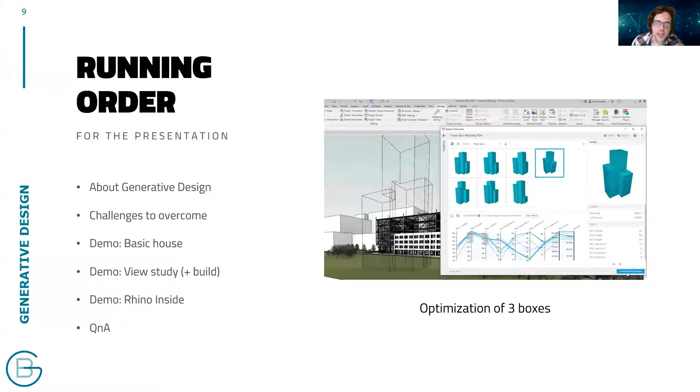I was going to build it, but I think that might take a little too long. I'll focus on at least what's happening inside Dynamo so you can understand the relationship between the generative study and the Dynamo script. Then I'll briefly show an alternative approach using Rhino inside Revit—not just Rhino and Grasshopper, but actually running Rhino inside the Revit engine. Then a brief Q&A session after that, hopefully.

So what is generative design? Simply put, it's generating multiple outcomes for a given scenario or challenge—taking a problem, finding multiple solutions, and then measuring their success, or what we might call fitness, which we usually measure as a number so we can easily compare it to other studies. From there, we can filter, cull, or select the best outcomes from that field of studies.

This gives us access to a dynamic way of testing both flexible and rigid constraints upon a design challenge. Rigid constraints might be something like the planning volume a building has to occupy, whereas flexible constraints might be the dimensions of that building within that planning volume.

We could imagine the most simple generative study possible being just a box with 2 dimensions. We'd first establish our flexible constraints—in this case, a width and a height. We then say we have domains to test between, an upper and a lower value, like a slider the generative tool can flex between. Typically this is how most generative solver tools work. So in this case we have 2 domains, 1 per variable. From here, we need to establish a fitness goal.

This is usually the most important part of a generative study, and it's one of the things I recommend you identify as early as possible: what is the measure of fitness? Because we can't always easily measure something that relates to fitness, given that it usually needs to be a number, especially if you're doing something with an aesthetic measurement, like how good a design looks. That's usually hard to measure with a number. But in this case, we could say the perimeter or the area, and minimize or maximize as a target.

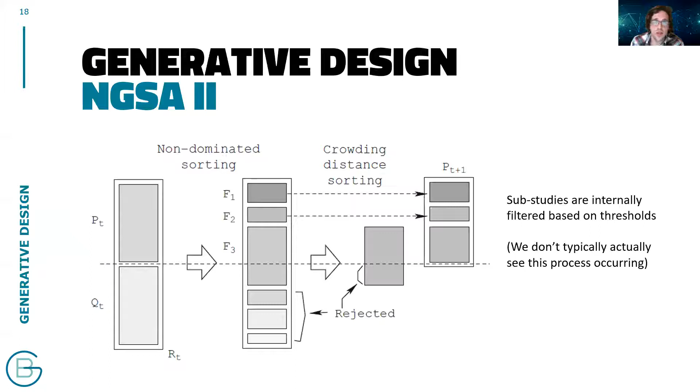But I guess the good news is that at the surface level, we just see the tools and the solvers. Autodesk's algorithm sort of lurks behind the scenes - I believe it's the NGSA2 algorithm, or at least a take on it - but you just see the surface of what happens there. So the good news is you don't see it; the bad news is if you want to manipulate the algorithm more, you don't have that deep access into that routine. But I think most of us wouldn't know how to manipulate it anyway.

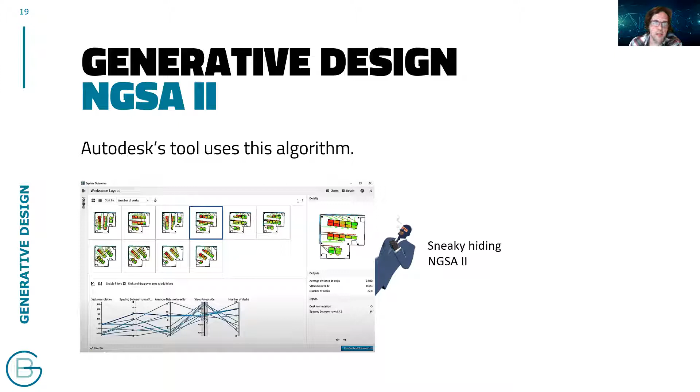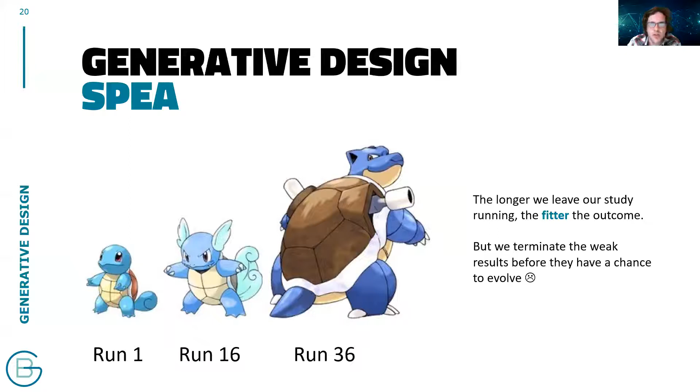The alternative is SPEA. This is used in tools such as Galapagos for Grasshopper. I like to look at it more like an evolutionary process - you're taking something, and as you leave it for longer or run more studies upon it, it gets better, or fitter. Unfortunately it also means we're terminating the weaker results, so not every Pokemon makes it. But yeah, the Galapagos engine for Rhino 3D is essentially using this algorithm.

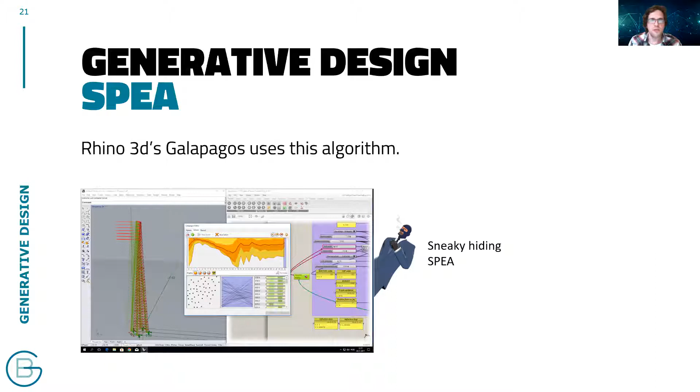Unlike the Autodesk tool, you'll see in my demonstration that it actually exposes a lot of the generative aspects of the algorithm to you much more holistically, which I hope is maybe something Autodesk is looking at doing in future as well. But simply put, it's a little bit like this: in Grasshopper, we call the generative inputs genes, and we feed them through a study or an algorithm that we write ourselves. If anyone doesn't know what an algorithm is, it's really just a set of operations to lead to a result. So when I say an algorithm in Grasshopper, just see it like a script.

We get the goals, and then we analyze those goals and how our study went, and we send back the best results to the input genes. So we're essentially clamping those slider values until we get an optimal or optimized outcome. This is sort of how that process of evolution works.

One thing I've noticed with generative design is it has become a bit of a buzzword or a hype cycle. We see these pop up quite often in architecture. Probably the one before this was artificial intelligence, which is still doing the rounds, and digital twin to some degree. A lot of people are talking about generative design, some are playing with it, but I haven't seen a lot of firms actually contextualizing its use. There are some, but many are just experimenting and haven't quite found the fit for the tool or workflow within traditional architectural practice thinking. So it can feel a bit that way if you're just starting to explore it.

So I always say to folks that it's time to look at who's actually using these tools and why it's been successful, how they've made it successful.

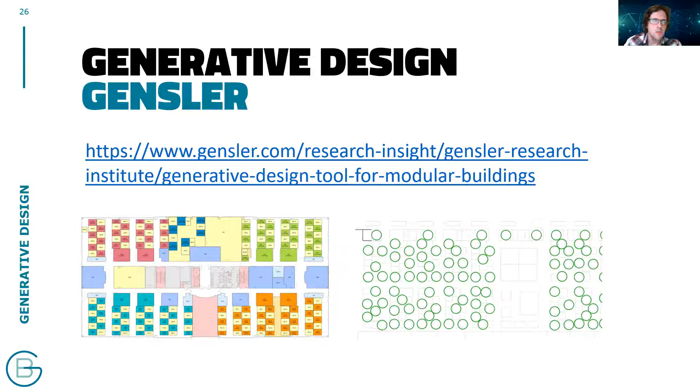GENSLER, for example, doesn't share as much about what they do, but I know they're using generative and solving-based routines for things like chair distributions in their offices, finding optimal maximum seating arrangements based on COVID separation, which is actually what a lot of people are probably using generative design for right now.

Companies like TestFit are using what you could probably call generative design, or at the very least algorithmic design, to find optimal layouts on sites. This leads to rapid prototyping tools such as TestFit, which enable people to bypass a lot of the manual design processes that usually take a lot of time during feasibility or master planning stages.

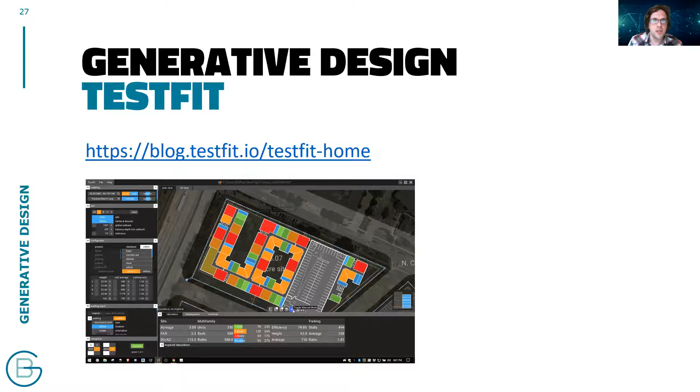It's important to understand that generative design isn't new by any means. Generative design itself has been through a few different stages of development with Autodesk. Probably the latest one people knew about was Project Refinery in beta, and it had a few iterations before that. What we have now is similar to Project Refinery. There are small changes at the surface level, but for the most part it's been a fairly consistent tool for the last couple of versions.

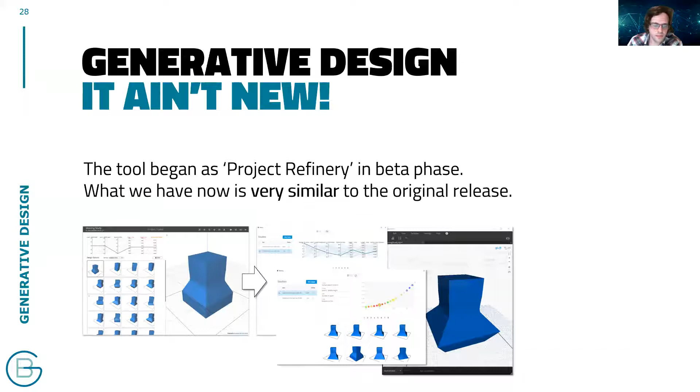Generative design itself came to Revit 2021 near the end of last year, but it's important to note that Rhino 3D has had these types of tools available for almost 10 years. This really leads me, and probably anyone else, to ask: if we haven't embraced this as a firm, as a person, as an industry, will it change just because Revit got a new tool? I'd say in a lot of cases, probably not, but at the same time it does raise the question that maybe there are some things that might make us consider it.

So the big question is, if we weren't using it then, why would we use it now? Some good answers are that our computers are stronger. We can run more studies more quickly on more computers with more memory and more software that can support it. We're also learning how to code in AEC now, so programs like Dynamo have exposed more people to a computational way of thinking, which is really required in generative design. As well as this, our projects are becoming more complex, so there are more complex things we're measuring, creating, and analyzing.

So this could be a way to solve some of that complexity that analog processes can't really take on. As well as this, a lot of our clients are becoming more data-centric, or we're taking on clients that already think from a data-centric perspective. For example, I can see companies like Tesla starting to move into the architectural industry, at least from the production of their own factories. They have in-house BIM managers now that I know of. So it's interesting to see that the programming sides of all the industries out there are starting to coalesce a little bit more. Some bad answers for why generative design might be something you're considering.

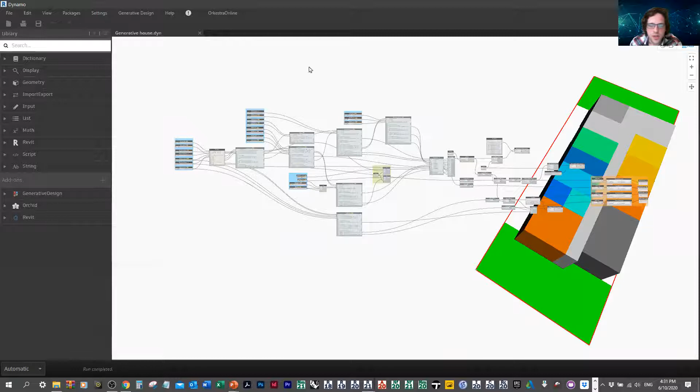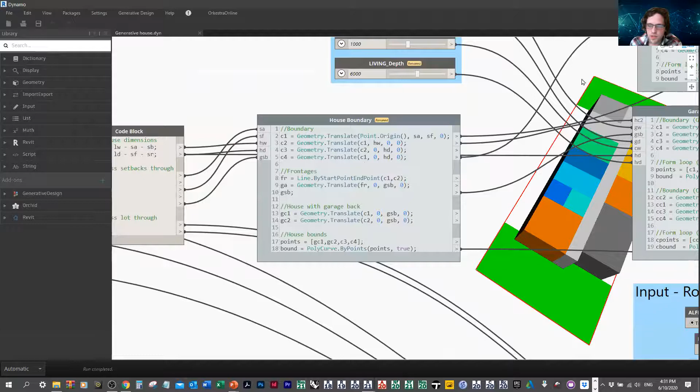In this case, I've actually programmed every single piece of geometry as its own little piece. I'm not going to break down everything in the script, but essentially I've got a whole bunch of inputs, for example, the dimensions of my site. I'm doing a lot of processing to start building forms, such as the boundary of my site, and then taking various pieces and progressively building other components of the study.

So for example, defining my alfresco, my garage, or my corridor. And there's some inputs here, like, is the alfresco included? In this case, I've been setting these all to inputs for the generative tool.

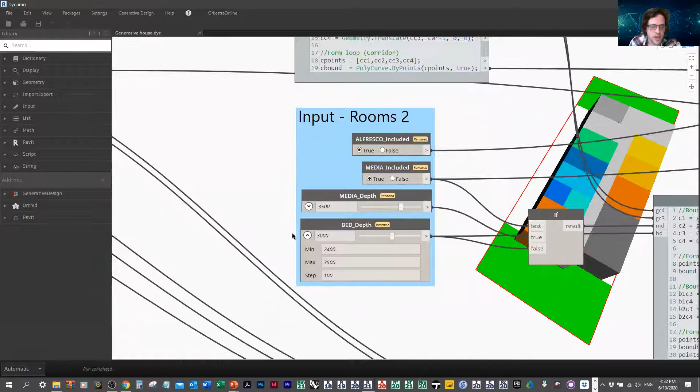I've also been setting ranges for some of these elements. So for example, the bedrooms can't be shallower than 2.4 meters and they can't be deeper than 3.5, and then I set certain steps of how far along that range they can be. These are going to be the inputs that the generative tool can flex in order to create my study.

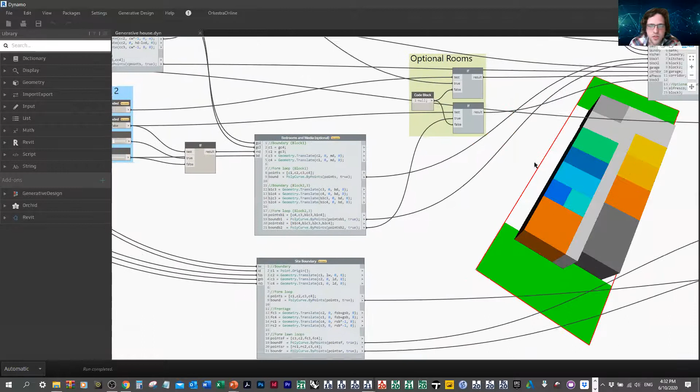I'm doing a fair bit of just basic geometry processing, a couple of optional logic gates to process whether some of the rooms are included or not, and then collecting some metrics at the end.

So right at the end, I'm essentially collecting these elements as surfaces and measuring their area, and then I can target these as areas right at the end. So I can target the area of my living room, my corridor, my lawn at the front or the rear. So I could minimize my corridor and maximize my living room, for example.

But obviously I'm dealing with quite a fixed layout here, so from a generative aspect, it's already a little bit limited in how I've approached the problem. But to create a space-planned flexible element, that would take a very long time. That's a whole other side of the generative design study tool again.

It relies on a package called, I think, space planning, just word for word, and it involves a very abstract way of approaching a design. So you're not necessarily generating a floor plan, you're generating a space matrix with relationships instead, sort of like a functional relationship diagram, which you might have seen before.

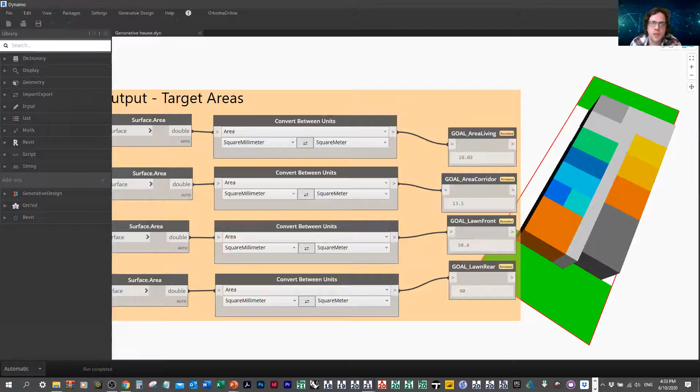At the moment, this Dynamo script is just generating one outcome based on all the inputs that I've given it. But what I've done after this is go to generative design, export for generative design, and then export this out into Revit as a study, giving it a name and a logo.

In this case, I don't have to cache any data into my script because it's going to be running with fresh data every time. There's no Revit data that it's collecting.

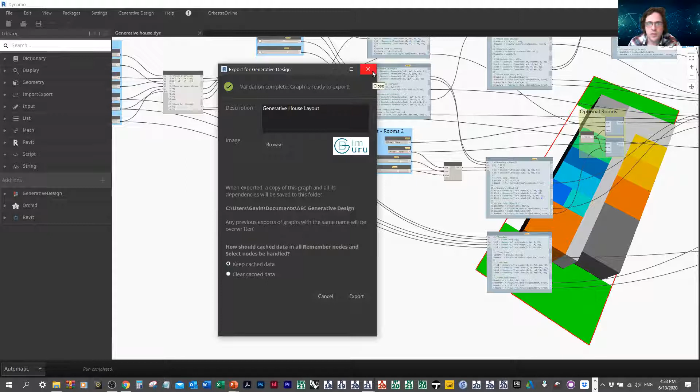The study that I'll show you after this one will collect a few Revit elements, so it is still possible. Sorry, I've just got a cat about to walk across my computer.

So in this case, I'm actually just going to close Dynamo. I'm going to go into the create study button on the Manage tab, and I'm just going to run a generative study. Remember, this isn't relying on Revit at all—it's just all built internally in Dynamo.

There we go. So you should get a little tab like this when you run a study. There'll be some default samples by Autodesk.

I'd say that the nature of these studies is a good demonstration of some of the limits of the tool itself, especially when it comes to the ability to process geometry quickly. These studies are all quite small scale and quite simple, so they do convey that maybe the tool's not necessarily the right approach if you're doing, say, solar optimization on a facade. In that case, I'd say Ladybug and Grasshopper are probably a better solution.

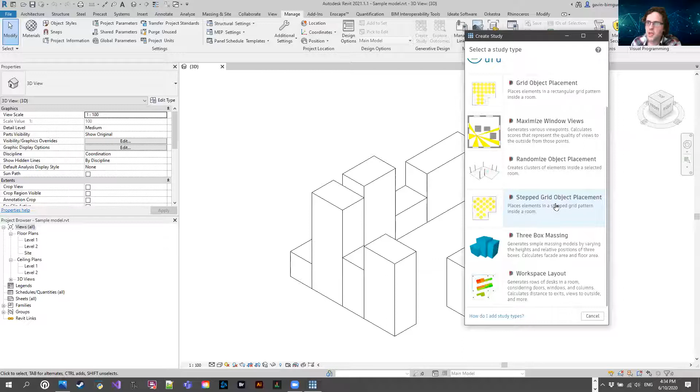But anyway, we're going to run this generative house script, which I exported earlier, and you essentially get the ability to choose which variables are going to be flexed or measured during the study.

In this case, I'm just going to change my method to randomize. So there's three approaches to generative studies. I've never used this one—I assume that just runs it exactly as the inputs say.

Randomize will literally let those values be all over the place. And optimizing will use a deeper algorithm with the NSGA-II approach, and it will actually optimize some of those variables to give you more refined results that are closer to the fitness you're targeting.

And then cross-product, I believe, gives you every possible result the tool can create, which in this case would be millions.

So I'm not going to run that. I'm just going to work with a randomized approach for now, and disable a couple of these variables. I'll say my site is a fixed size, and you'll notice once you disable these, you can specify the input. So you get a bit like a hybrid between Dynamo Player and this tool, which is quite friendly.

I'll just let the site controls all be locked in this case, so I have a fixed site condition, because this is how the tool's intended to be used, in that you probably already have a site you're bringing this tool to, and you're just trying to run an optimization of that design upon the site. But from here, I'm just going to let every other variable have control.

So these are all the dimensions of the rooms in the house, and also whether some of these rooms are included. In this case, I'll just be able to measure my results at the end.

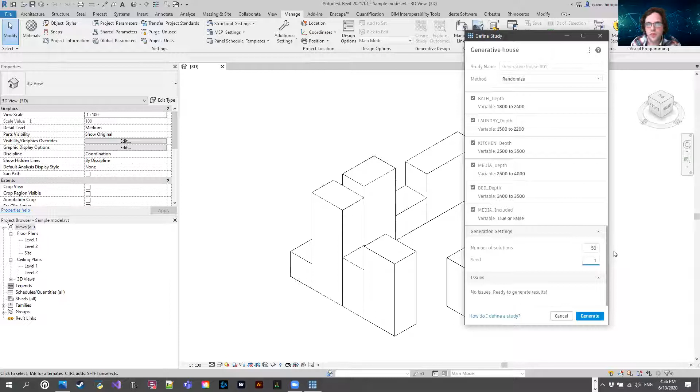Once I hit generate, it takes me to the tool itself, and you can see various studies. In this case, I'm just running Generative House 001. If you do a lot of studies, it's possible to go through them. This is essentially our field of results, and then all the variables that those results contain.

It's a little bit hectic in this case because I have quite a lot of variables that I'm measuring, but really the main ones I'm dealing with are these ones that I've labeled with 'goal' on the front. I usually recommend labeling your parameters to make it easier to tell what your goals are, so when you see them in this cramped environment, it's not too hard to make them out.

In this case, I'll just sort by the area of the living room, and sort descending so that we get first the results that have the largest living room space. And we can see things that sort of make sense in this case.

There's a room here I can exclude, and also another room here that I can exclude in Dynamo. As you'd expect, most of the results that have this don't have the most area when they omit these rooms. But I can see that there are actually some more surprising results - for example, this one here still has a larger living room space.

So if I was targeting a design that has an alfresco but has the most living room possible based on other room dimensions, this tool might have been quite useful for me just then, because I would have had to experiment with quite a few setouts.

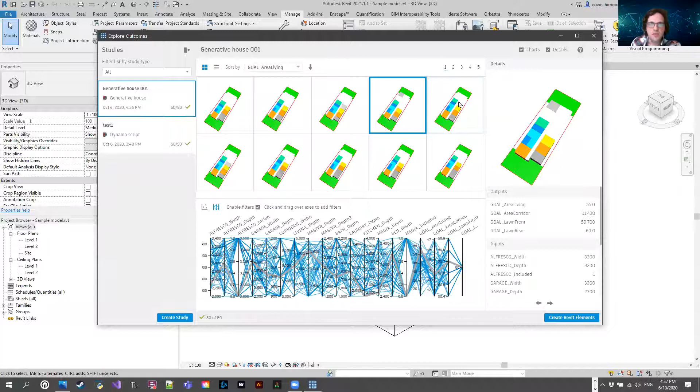Obviously, again, it's a very simple house, so maybe you're smart enough as a home designer to not need a tool to tell you this. But in this case, you can see that it's not always a predictable result. Like I said, you shouldn't go in necessarily expecting to see the result - rather, the tool shows you the result.

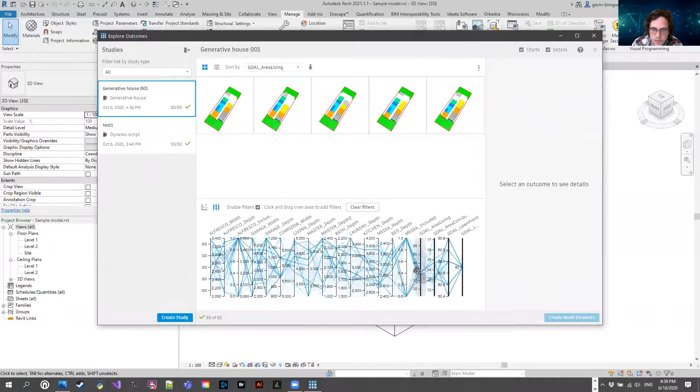I can also filter down as well. So if I just want to see results that have quite a high living area, I can actually just click and drag a little filter and start scrolling down through my results. You can see that the options field decreases or increases based on this, which is quite cool. I find it's a really friendly environment and user interface.

This is probably one of my favorite things, or one of my biggest positives that I give the tool, in that I think this is a really well put together user interface, especially for people that don't necessarily understand computation. So if you're building a script, putting it in the tool, and letting a design director run this tool, I feel like they'd be much more capable of doing this than, say, running Grasshopper or Dynamo itself. So that is one really big positive.

And sometimes you will find things that maybe were a bit surprising about your result. For example, we always have the same size lawn here. Well, actually, that makes sense because we limited our site volume.

It might also just visually help you troubleshoot when you've set up your Dynamo script incorrectly. So that's just a very basic example of what we can do.

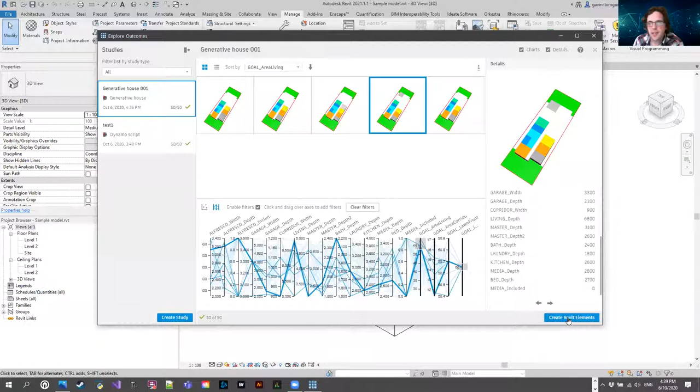We can obviously see the numbers we're using to generate our inputs as well, if you wanted to reproduce the study in Dynamo. And if your script does have any creation nodes at the end to create Revit elements, say the walls of the house, this is possible to set up as well. In this case, I've just set it up to run in the tool.

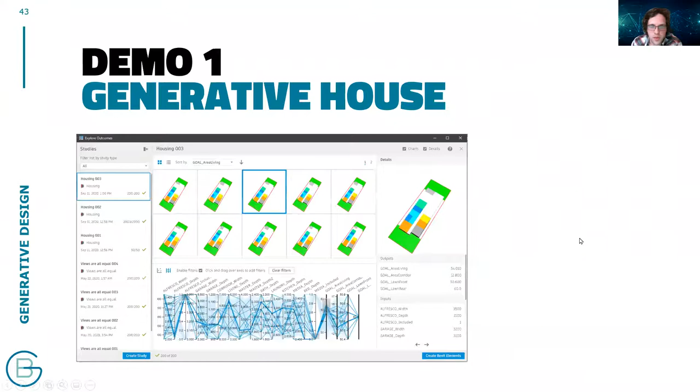So that's one example of a quite basic study in the generative tool. Demonstration 2, which I was going to put together node by node, but I think I'll just run through the script instead in a bit more detail - also in the sample files - deals with a site solver. This is probably a much more common application for generative design when we're dealing with a building mass on a specific site.

We want to optimize various aspects of that building. Usually targeting the highest yield of area is a very common thing, but maybe we're doing it considering other aspects of the site, such as solar amenity, or daylight or view analysis. In this case, I'm analyzing my view aspects to find the position on the site where I get the best view aspect, and also the building shape that will give that.

There are some things that are probably quite obvious before I even start this study - the taller my building, the better the views will probably be, because I'll have more opportunities for views. So you might want to mix and match with other things, such as dividing the floor plate using a simple division algorithm to determine how many apartments you can get on each floor. Maybe you'll have a threshold where you need no less than, say, 6 on a floor.

There might be some limit that sort of limits what you can actually accept as a good result. In this case, I've worked quite simply and just focused on giving the building a fair amount of free rein and giving it a position on the site randomly, and then measuring the amount of views I can achieve.

So I'm going to jump into Revit 2021, open up the sample Revit project from the sample files, and boot up Dynamo. I'll run through the script, which is also available in the sample files, but I'll spend a bit more attention on some of the nodes and what they're actually doing in Dynamo as well.

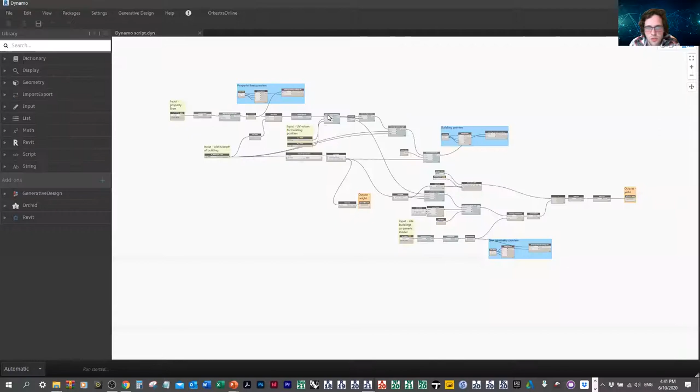Note that if you had the generative tool open, I believe you usually have to close this - I don't think Dynamo and the generative tool usually let each other stay open at the same time. I'm just going to open up my copy, and it should run in automatic mode. You'll probably see a result come through if it worked on your side.

The only custom package I believe I'm using here is the Generative Design package that comes with Revit and also with Dynamo as a result. So in this case, I'm essentially starting my script with an input.

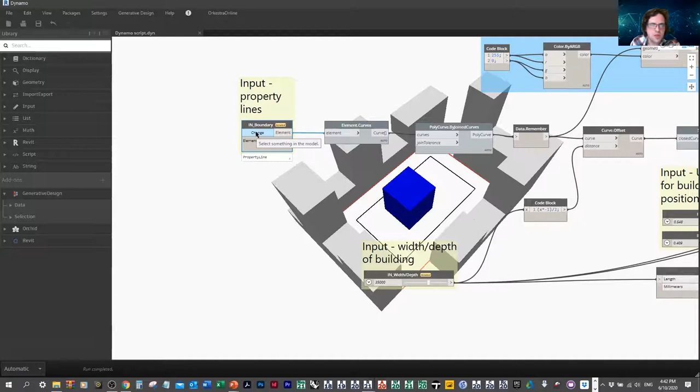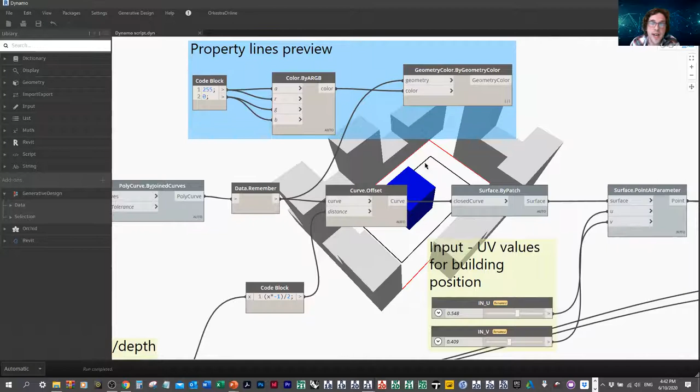I'm selecting my property line from the Revit model, just using a select model elements node, and I'm obtaining its geometry as a polycurve. At that point, I'm remembering that input so I can return this element back to my generative study if I want to work with this property element from the generative tool, regardless of the model I'm in. I'm also generating a custom preview so I can see this in my actual output for the generative tool - in this case, I'm just making it red.

I'm then offsetting my site boundary inwards, because I can't have a building that overhangs the edge of my site. I'm offsetting it inwards by half of the width, which is also the depth of the building - it's always a square building in this case. This makes sure that, at the very worst, it can sit hard up against the site, which obviously is going to impact on the views.

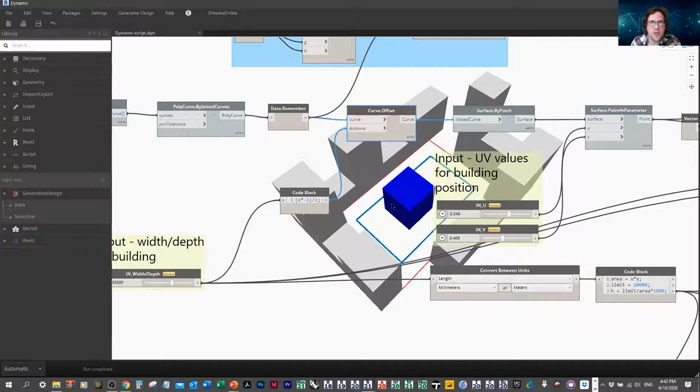So you probably won't see too many results where it's hard against the edge of the site. I'm then just generating a patch in this case. I've turned off the preview for some of these, but I'm just generating a surface within which I can place my building.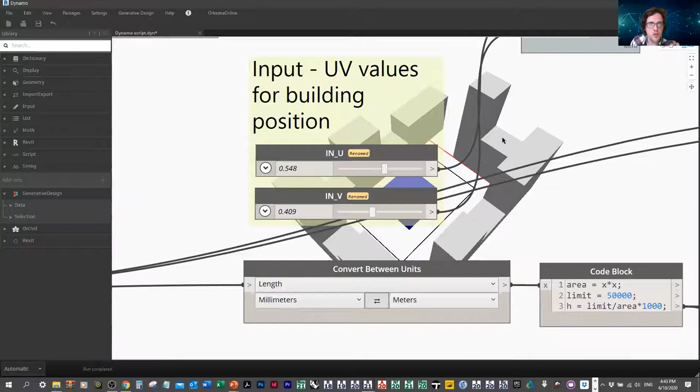I'm placing a point at parameter, so I've got two variables between 0 and 1 for the U and the V of where the building will be placed on the domain of that surface as a placement point. And then from there, I believe at this point I'm just generating a plane at that point.

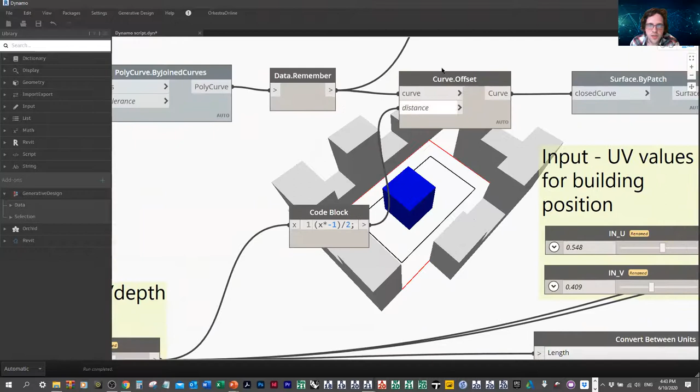If I go back a little bit, this is where I'm just targeting the size of my building. So I've given it a domain of 15 to 50 meters. That's where I feed in that negative offset to move the site inwards for the placement point.

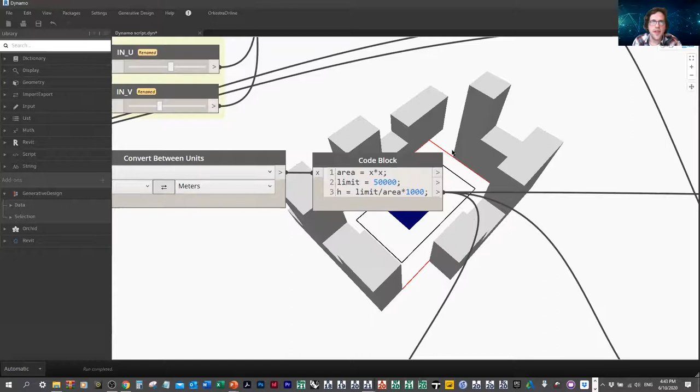I'm then just converting this, and I'm using a little formula to target a maximum possible area yield that can be achieved as a result of the study. So I'm saying in this case that I can't go higher than a certain number, and this limits the height of my building through controlling the relationship between the height and the width, because then I'm outputting a height based on the algorithm.

I'm then outputting the height. I'm just using a floor to round it down, and then I'm outputting this as a testing target if we so want to optimize it.

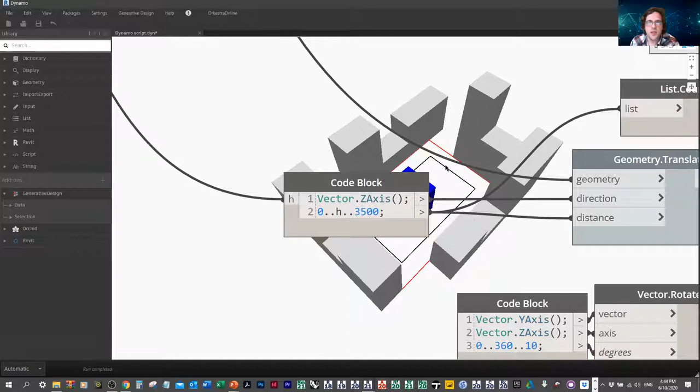From there, I'm also creating a range. In this case, I'm creating the number of possible intervals at a 3.5 meter interval that I can fit on the site. So at every floor, I'm going to generate test points to test the view aspect of each level, and then use these to intersect my site.

But first, in this case, I believe I'm taking my building, so I'm creating an extrusion and then just overriding that here, just so I can see a preview of my building. In this case, I'm taking this range and I'm offsetting a point at the placement point of the building by each floor so that I have a point at every level of the building.

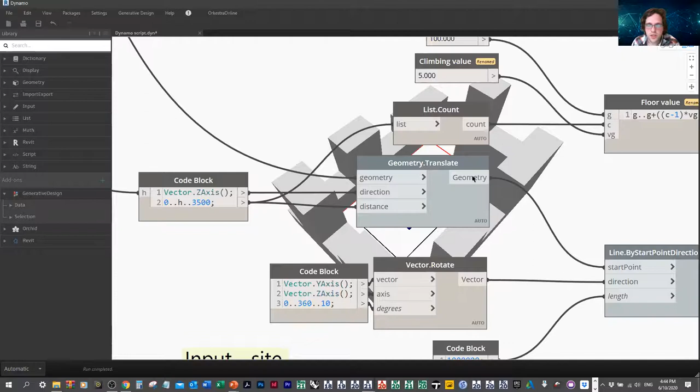So if I just go and turn off the preview for the building, I essentially just have a stack of points, one per floor. And these will be the points that I place my test lines to intersect with my site.

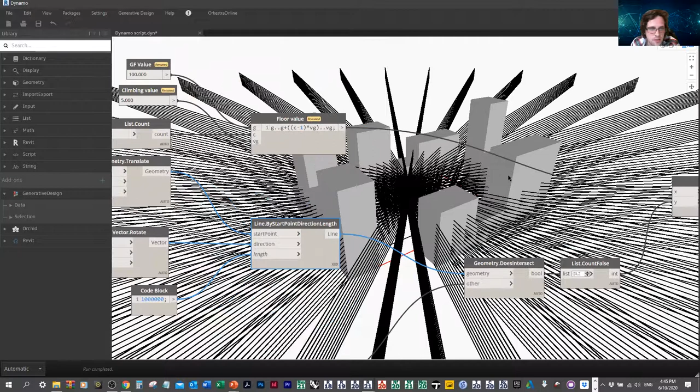I'm then creating a line outwards in each direction. In this case I'm using a few things to do this. So I'm firstly creating a vector and rotating it by a range of 10 degrees between 0 and 360, and creating a line, or a vector in this case, for each of those lines. And then using a cross product so that for every vector, every point will shoot a line out by that vector, which leads to my test curves.

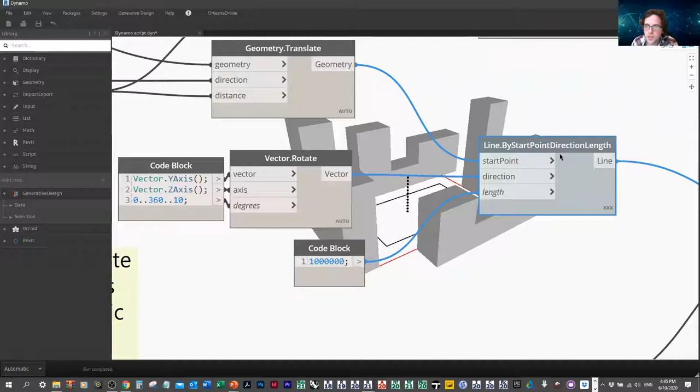From there, I'm taking those curves and I'm just checking if they intersect with the geometry of my context. In this case, my context is just an in-place mass.

One challenge with Revit and site feasibility is that typically the high resolution city models that we tend to use don't tend to play very nicely with Dynamo. Typically, it will just fail to build most of these because there's too many faces or too many edges. That's where things like Rhino and Grasshopper can be a little bit more beneficial.

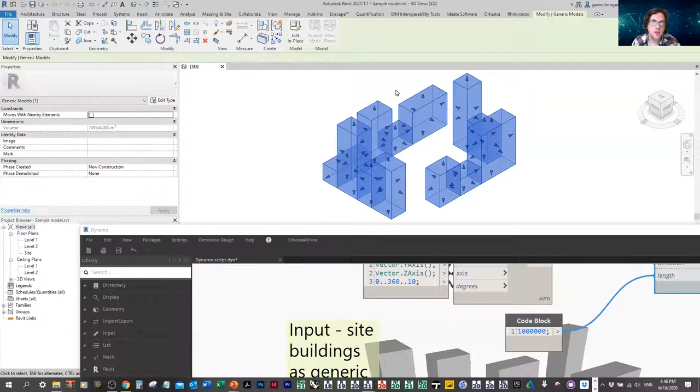But in this case, what most companies I know do is they rebuild the site in a more rough representation, to the point where it can still be relied on with some degree of certainty for shadowing or obstruction, but at the same time, light poly enough that Dynamo can handle it. So in this case, that's what I've done here. I'm taking the geometry and just joining it all together into one solid.

I'm then again remembering this form, so this is part of the generative design package. And I'm just giving this a preview as well so I can see my site.

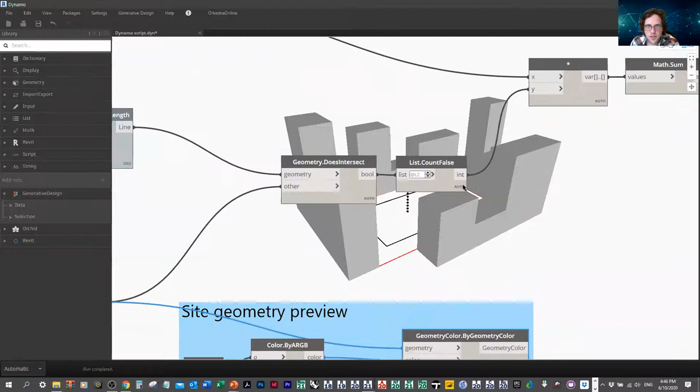I'm intersecting all these lines that I've generated, and then just counting, in this case, how many instances of false there are, and multiplying this to generate the number of successful outcomes from the study. So in this case, that's just a really easy way of taking the total number of hits with the site and excluding them from the study and just taking the successful ones.

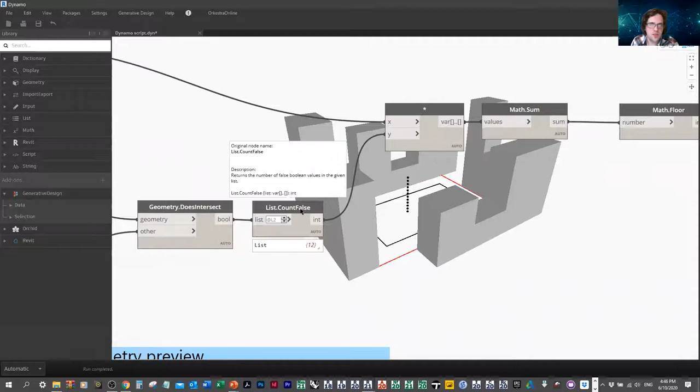So essentially, when you get an instance of false, it means that the view ray hasn't intersected with the building volume, and then counting these and scoring this as a yield of the views. So that's essentially how the script works. It's relatively simple. I've also rebuilt it in Grasshopper, so I'll probably show that shortly as well. But once we're happy with the study, I'll just go back and fix some of those previews up.

So I'll just turn off that geometry node. If I go to Generative Design, I can export for Generative Design.

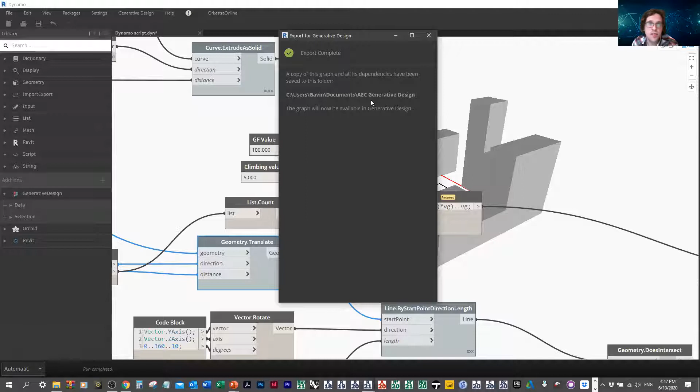Again, I can give it a description. In this case, I might just make it again, so I'll just say optimization 2. And this should create a copy of the Generative Design files. Typically, they get stored as a little subfolder in your documents. I believe there might be a way to change that path in your preferences, but typically that's where I just let it save to. So I'm just going to close Dynamo.

At this point, it's important to note the script and the tool have no relation. So you do need to re-export if you want to update your script.

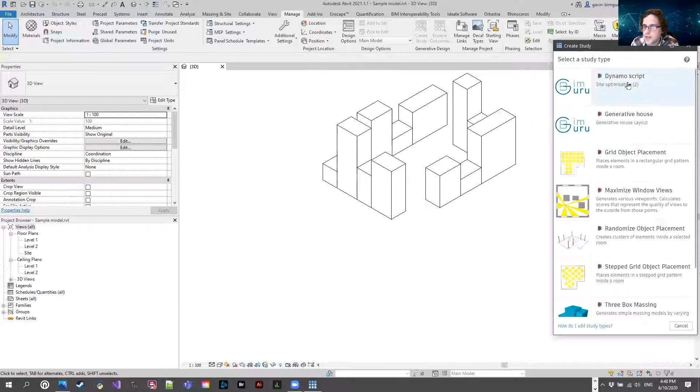So I'm just going to go back to Manage, Create Study, and we should see a new study available. So you can see in this case, I've just got this second site optimization. I can then, in this case, maybe work with an optimize function so that we see slightly less variance in our results. And in this case, I'll just let UV and the width factor of the building just be flexible.

Let's say we're trying to minimize our height but maximize our score. I haven't tried mixing these two before - they could be quite interesting. And you can also set thresholds for the constraints of what you'll accept in this case as well. Let's just work with a population of 20 with 10 sub-studies in this case.

So when I generate, it should open up the tool again, and we should now see some results starting to be generated. In this case, we're doing 10 sub-studies with 20 internal generations from an optimization perspective using that algorithm. So it will take just a little bit longer, but there we go.

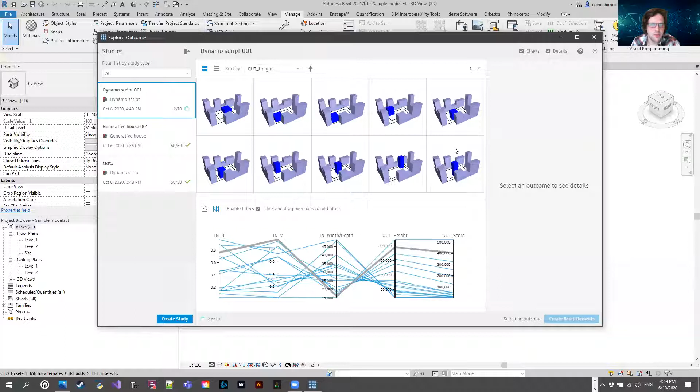We can see we've got quite a high variance of results, so we may wish to pump up the number of results that we are measuring. But again, in this case, I can check what's my highest height. I can see I get some relatively, probably what you might say are silly results. So this tool is good for showing you when you've been a little bit too generous on certain constraints.

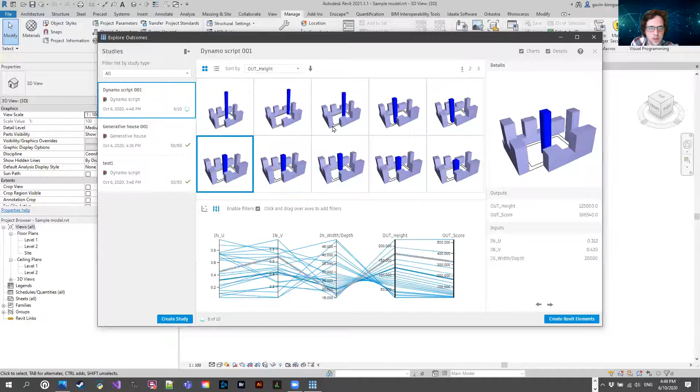But I can also see the worst results are obviously the shorter buildings. And it seems like there's not really an aspect that's best on the site, at least at the moment, from what I can see. It looks like some results are preferring this corner of the site, but it's probably not quite enough for me to make any good judgments about the study yet.

So what I like to do sometimes is just do a randomization study with a lot of results, because I found randomize is quite a quick study to do. So sometimes I'll just do randomize, and I might do something like 150 results. It can be relatively quick at generating results, depending on the complexity of your study and also the fidelity of the geometry that you're using for testing. That really does have quite a big impact on the results.

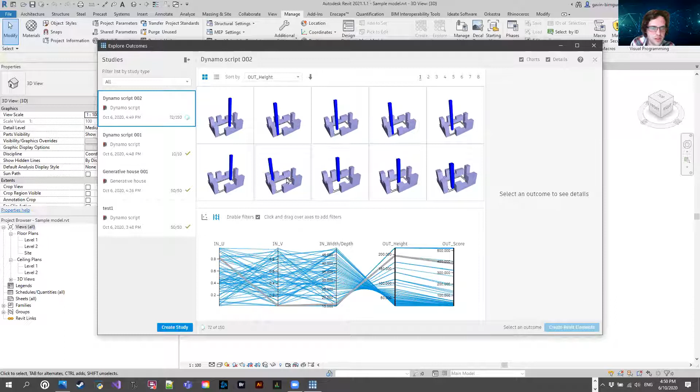So I can just start sorting descending already, and obviously I can start to see that there's a bit of a trend with my results - at least that the really tall designs are giving a better yield. And I can start to make some assumptions about various aspects of the site that seem to be performing better. For example, I can see this back corner of the site is sometimes preferred, and sometimes this front corner is preferred as well.

Now, one thing you can't do is obviously go and view those preview geometries. So let's say I want to go and see all those sight lines - I'd have to make that a part of the study. So there is a little bit of interactability lost to some degree. You can at least navigate the preview, so you can move around this result, which can help.

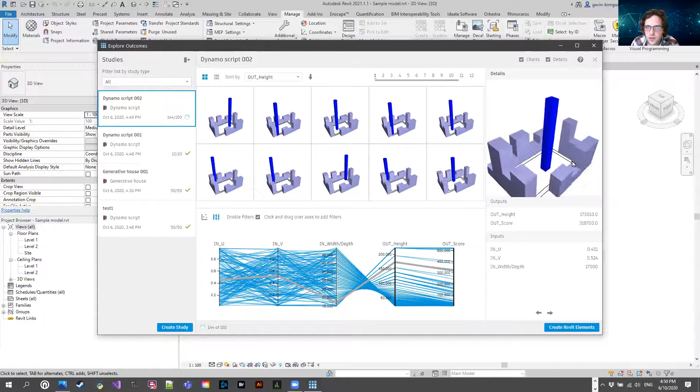And I can obviously go and sort of clamp certain aspects and say, okay, I only want to see my really successful results, and I also want to see my unsuccessful results. Now, one comment I got on this video that made me think about just having to think in a generative way was, well, what if I just want to test one outcome?

And I'm like, well, then you're not even using generative design. So it's good to think about whether you're letting the tool do the talking, or whether you're talking to the tool, in which case you might just need a Dynamo script to prove your idea.

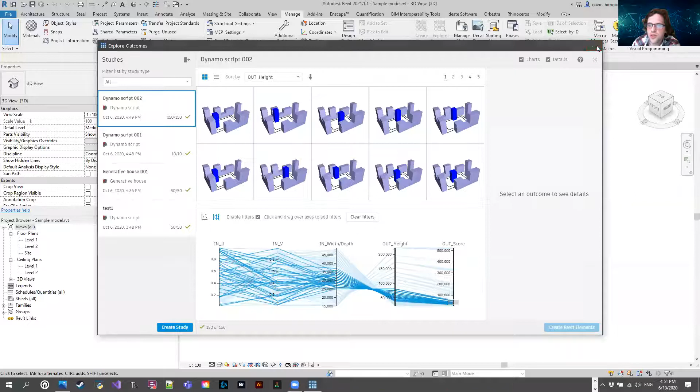I might just also quickly show you the same thing, but using a Rhino Inside approach instead, because I think that's worthwhile for comparison. We're going to use the exact same challenge, but I'm going to use Galapagos as my solver instead.

Rhino actually has a lot of different solvers. I think it has more than ten that are quite well known. Some of them are very complex as well, far more complex than Autodesk's forays.

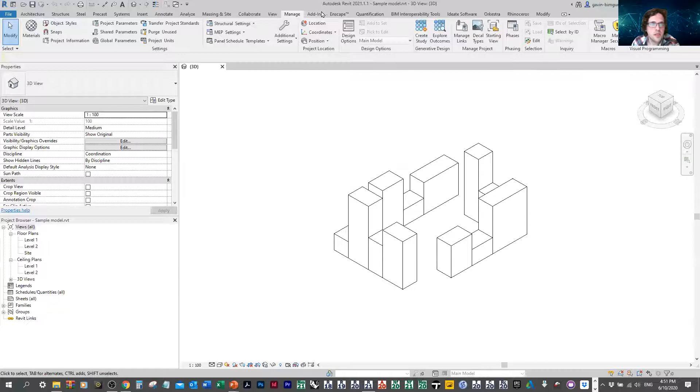But in this case, I'm just going to boot up Rhino Inside. I'm going to open Rhino Inside Revit. And this is my Grasshopper script built to essentially achieve the same outcome.

So I'm actually sourcing live Revit elements at the moment, using a Select Revit Element node in Grasshopper. If you've used Grasshopper and you haven't used Rhino Inside, and you use Revit, definitely check it out. It's pretty cool. We probably don't have enough time to really go through it all.

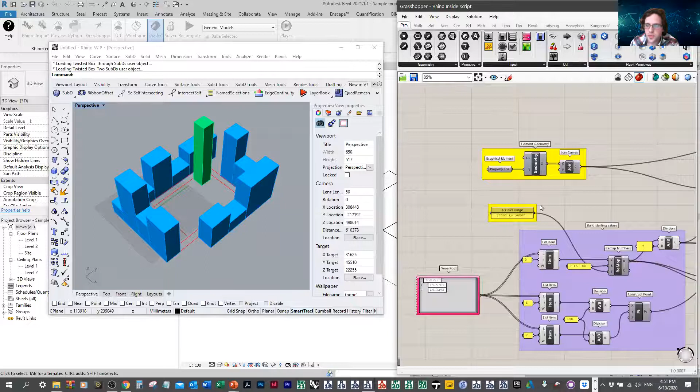This is my gene pool in Galapagos, which allows me to set my variables. I can also just shuffle the gene pool if I want to quickly test one result. You can see the impact of that on my study here.

What I'm doing is essentially taking all my results through right to the end, and I'm collecting a numerical fitness measure. In this case, this is just the number of successful views.

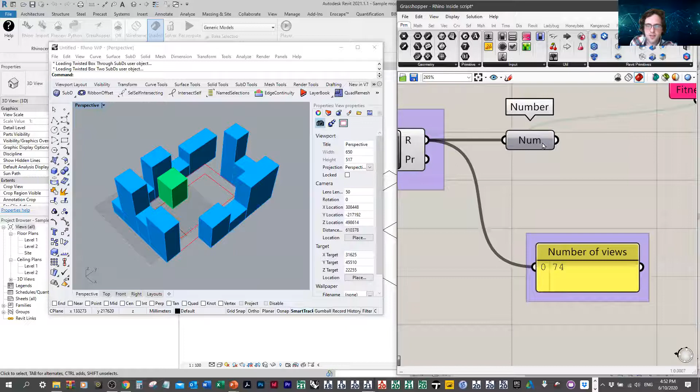I can then work with the Galapagos solver itself just by double clicking at the end. And this is Galapagos itself. You can see that you have quite a lot of control over the tuning of the study.

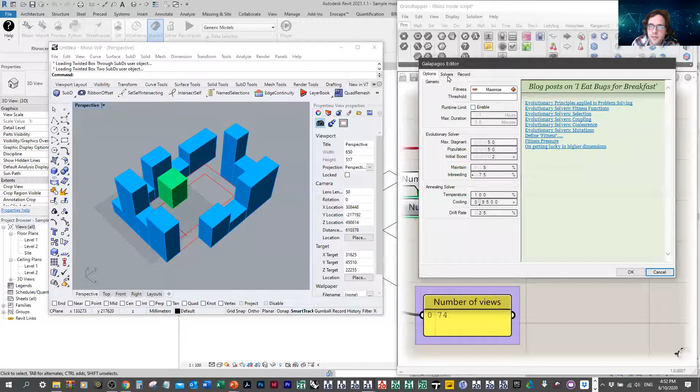You can also tell it, say, how many results you want to send through to the next iteration to let it evolve. The solver itself is quite complex. I'll need to actually start running the study to show you the solver.

But one thing I do want to point out is the speed of solving is quite rapid, and you will see pretty much every result as it is solved, which is pretty cool. So I'm just going to start solving, and you'll see that the field will start populating itself, and telling me it's getting more optimized as it goes.

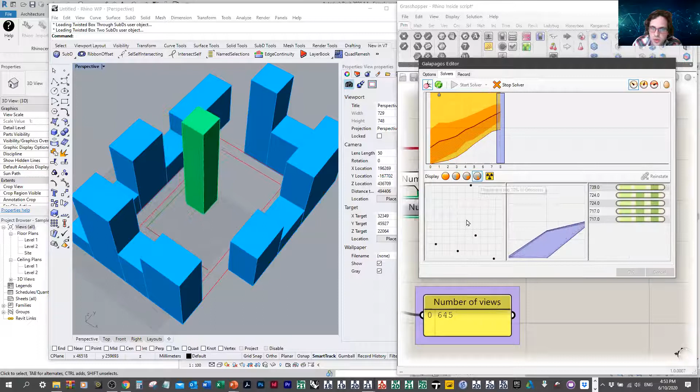So I can start to look at certain portions of the gene pool and start looking at only the most successful results. And unlike what we did before, we can start to make some informed assumptions about what we're seeing, because it's evolving, it's obviously showing us one portion of the site which has yielded a really good result.

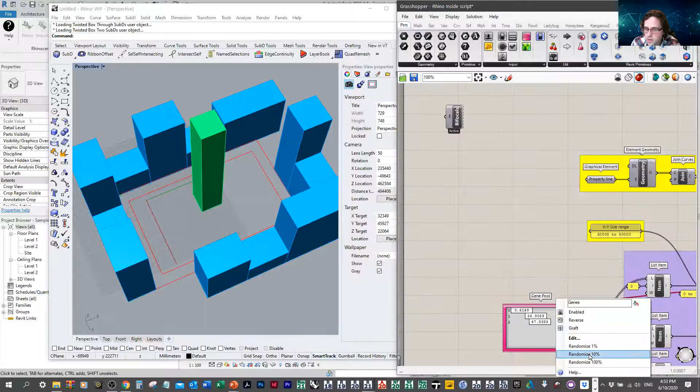Now, this might just be a coincidence, and in this case, I could typically just go back, stop the solver, shuffle my gene pool, and just start again, just to make sure that we're not making too much of an assumption.

But there is some degree of human interpretation of what's being shown to us. So you do have to be careful with evolutionary solvers, that there might be multiple optimal outcomes for your study, and you might just happen to miss one of them.

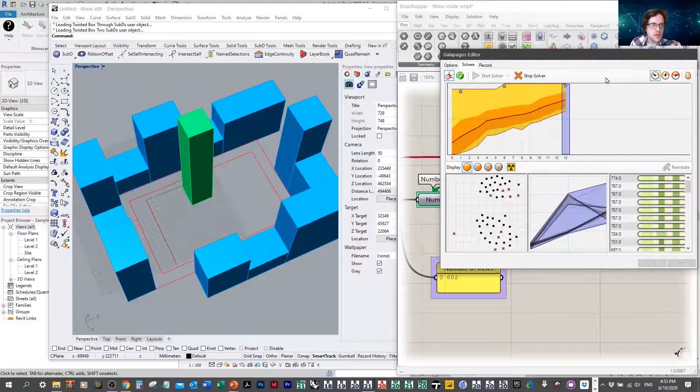We can see, again, we're getting a pretty similar result, but I find sometimes with this particular study - actually no, it did find a different result. So sometimes it does seem to find this portion of the site instead.

So unlike the Autodesk tool, this is a much more specific outcome, but there are much more interesting ways we can interact with those results.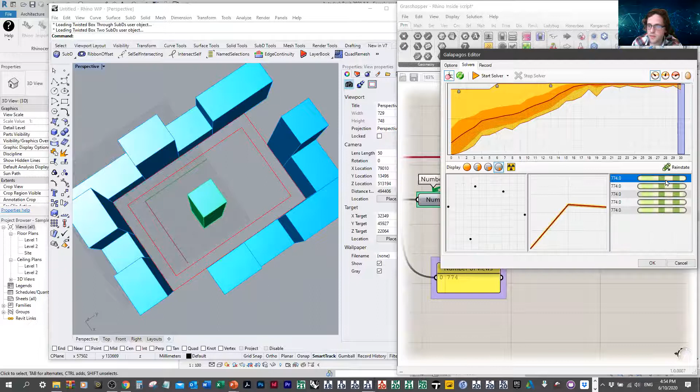An evolutionary solver can also take a successful gene from a previous study, reinstate it as the current gene pool, and just begin from that point. Now, in this case, we just let it be purely random again, so it's not necessarily working on a pure evolutionary perspective, but you can see it found that result much faster.

So it is a good way to at least verify that there isn't some abnormality around that area that we just happen to make too many assumptions about. So it's pretty interesting, and I definitely recommend checking it out as well, especially if you've already tried the Autodesk Generative Design tool.

I'd say try Autodesk's first, because you may find that you might find yourself a little bit biased just because of the speed. But I think there are some really good things about the Autodesk tool as well. So there's a few options you can use.

I guess in conclusion to what I've shown you today, I want to reinforce that we shouldn't be afraid of experimenting with new methods. If we don't, someone else will. There are a lot of disruptors in our industry, and I do think there is potential in generative design.

Having said that, I know some of my presentation is a little cynical, or just trying to be ultra realistic. Ultimately, I just want to see this handled openly and honestly by the industry, as well as by a lot of the software vendors who I feel maybe aren't always honest in their marketing about how difficult this can be to implement. Obviously, the difficulty is rewarded through the results you get, as long as you put in the research first. But I want to avoid us having gen wash, another form of BIM wash.

Ultimately, just be ready to invest a lot of time, effort and money, and make sure you ask the right questions about the study before you undertake it, to make sure the result gives you the most return on your investment and time invested. And also just be ready to use Dynamo, because it's pretty important to these tools. But thanks for watching, and I hope this was informative and gave you some ideas about how you might be able to use the tools. I look forward to taking on any questions you might have as well.

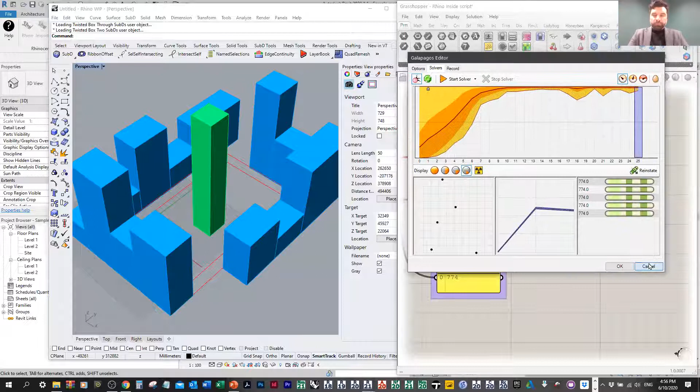I'll see if I can quickly generate a study from the basic sample project. I believe that might support one of the studies quite quickly, because my studies haven't really been built to generate elements. That's one of the challenges, but I'll just try opening a sample project. I believe one of them should work in the basic sample project. I might just need to hijack the path from my 2020. Just bear with me, I'll open it up. But in the meantime, it ultimately just depends on how your script is configured. I might be able to access the Autodesk script in this case, just to have a look at how that looks. Just bear with me, I'm trying to find my studies.

I think by default, I should be able to find one of the scripts that Autodesk has set up. I think the maximize window view dependency might create something right at the end. So I'll just need to open Dynamo, and get a path to one of the sample projects first. I've got it somewhere in here. Here we go, so I'll just use the basic sample house, and upgrade it. I haven't really been using Revit 21 too much yet, so I'm still laying out all my shortcuts for that one. Mostly working in 2020, but I'll upgrade this anyway.

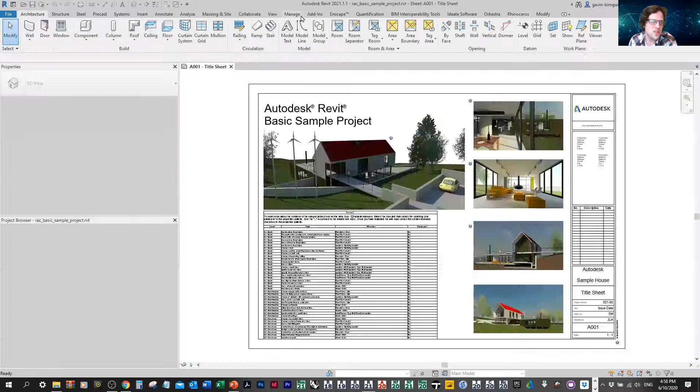I think this script is built to optimize the placement of an object based on all the windows in a room. It essentially generates from a point a cone of vision to each window, and checks all the obstructing elements that you can tell it, so if there are chairs in the way. It's a bit of a strange study, I don't know if it's that practical, but I'll see if I can look at the actual Dynamo behind the scenes as well. It might be locked off depending on how Autodesk has set this up. It looks like in this case, no, it's been condensed as a JSON. I'll try looking at the study anyway. I believe this one lets you generate the elements at the end, so I'll create a study.

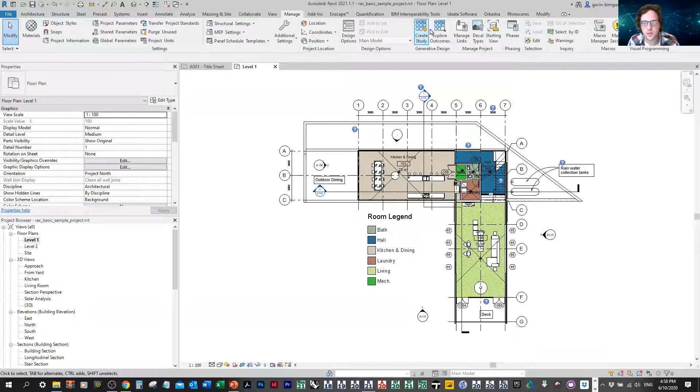And if I use the maximize, I could use the workspace layout one, but I'll try this one. So if I remember right, this one enables you to select a few things, so we can calculate the view from an element.

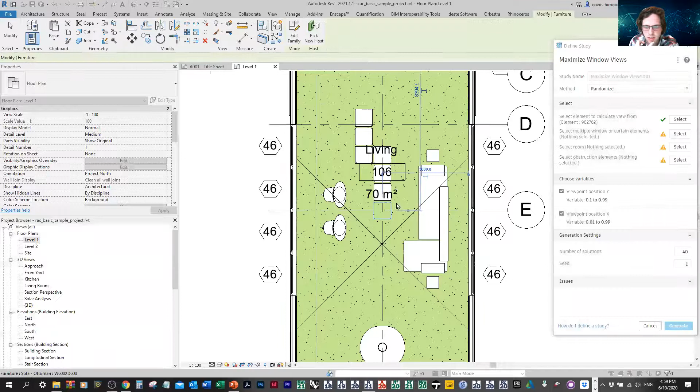So in this case, I'll just say I'm sitting on this little chair. We can select multiple windows as well. So I believe in this case, I should be able to pick a few window elements.

And this is actually using a pretty cool tool from the Generative Design package, which is a filtered selection, which is pretty handy. It limits how many types of categories you can pick, which is pretty hard with previous versions of Dynamo, where you have to select any model element you can select. So I find this is a really handy node just in general.

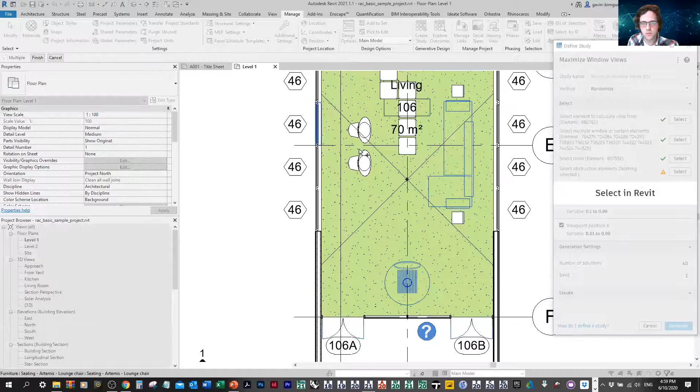We'll select the room that we're undertaking the study in, and we'll just pick some obstructing elements as well. And I believe it should just generate an obstruction on the floor plan, even if it's not tall enough to obstruct. And I'll just generate 5 solutions.

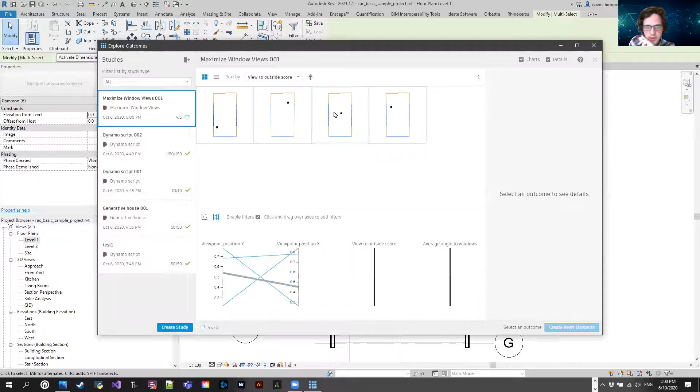And it should generate at least the preview geometry for the study, I believe. Here we go. And I believe this one should support the creation of Revit elements. Okay, so it doesn't show us the preview, but I believe it might create an element, hopefully.

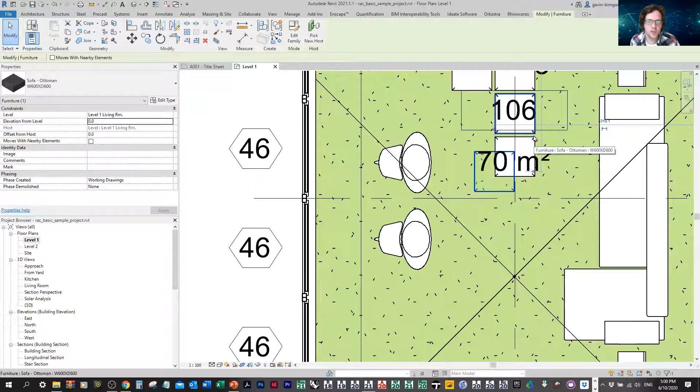Element creation completed. Not quite sure. Oh, there we go. It's created the chair here. So I guess that's the point that at least we tested from. In this case, the element creation probably isn't a very logical outcome, because I guess it's the point that we essentially tested from.

But I guess this is where you could tell your script to send some points to at the end for that creation node. I believe you need a gate in Dynamo. I think that's the trigger for what stops it from creating until the very end. Or it might just not create elements by default, but I think there's a gate node. Yeah, so there's a gate node, and I believe that's what triggers the creation limitation.

But I haven't actually done too many scripts that generate elements, so I might be mistaken here. But yeah, I'd at least experiment with this node and just an element creation on the back end of your script, such as creating a wall or something like that. And I think that's at least how that process is intended to work.

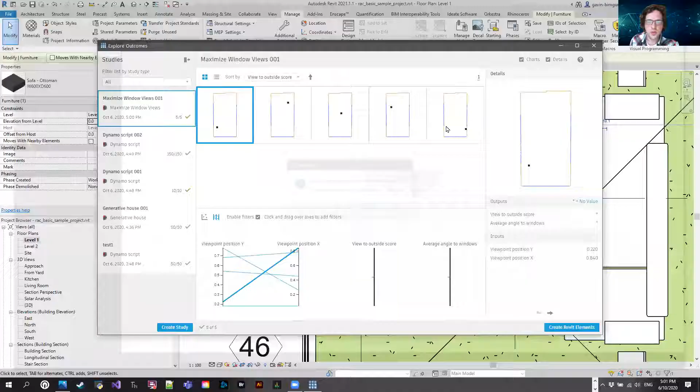So you don't create the element until you nominate the study that you're happy with. And that's the point where you can send the final creation of those elements back to the actual Revit model itself. Typically, I find that sometimes you can just literally take cues from what the study told you instead of creating an element as a result of the study. So for example, with that generative house layout, maybe creating a house isn't the best output for that script. It just depends on how you need your script to work.

So I think it's probably just worth experimenting with those gate nodes. And I'll probably put something on my channel, maybe at a later date, just showing how a more meaningful script could generate elements instead. You might be able to use the workspace layout script, I think is probably more meaningful. So I think there's a study in here that can do that. I don't think the desk is in here that does the actual placement of the script.

I'll just make sure it's actually here because I know there's a specific family that does the final step. Desk, I don't think the desk is here. I'll just load this in. I only just noticed the new Autodesk content tools come in as well, which is pretty cool. Looks like my content library is a little bit limited.

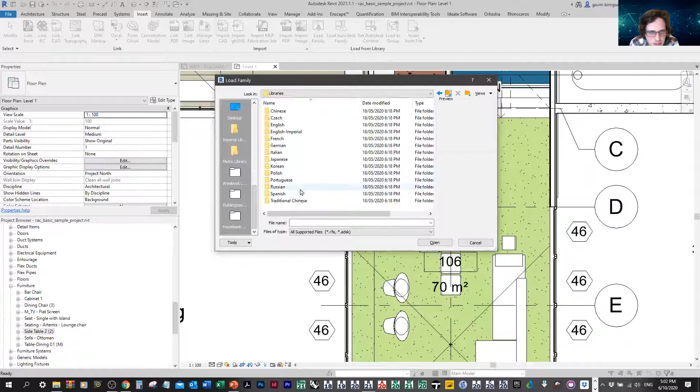Interesting. That's strange. I had content there before. Not sure where that went. Yeah, strange. It looks like my content library's been replaced by the last update, which is a bit frustrating.

Yeah, I probably won't be able to do it in that case because I don't have the desk I need. But definitely just try out the desk layout tool as well, and that will hopefully generate the desks on the back end of that script as well. But yeah, sorry I couldn't show you a specific example that I had on hand. I'll put something on my channel probably early November, hopefully, to cover that one.

We do have another question regarding where the filtered select elements node is found. Just opened Dynamo, I think it used to be in the generative design package. I think I could see it there before. I think it's under selection, and in this case there's limited selection options such as select room or select wall, or in this case you can only pick family instances. So there isn't an explicit category-driven filter yet.

I do know that you can do this using the Revit API. I know, for example, John Pierson of Parallax has built his own plugin that does this. I don't know if he's selling it yet, but I know it involves what I think is called a selection filter - that's the name of the element you have to use in the API. But they've at least built a few.

Using the API is definitely possible. I think it's relatively straightforward if you know how to use C#, but if you don't, it's probably a little bit trickier. In the meantime, there's a couple of common types you might need here, and even some drag selection options as well - different types of selection boxes versus explicit selection. But that's where you can find them for now.

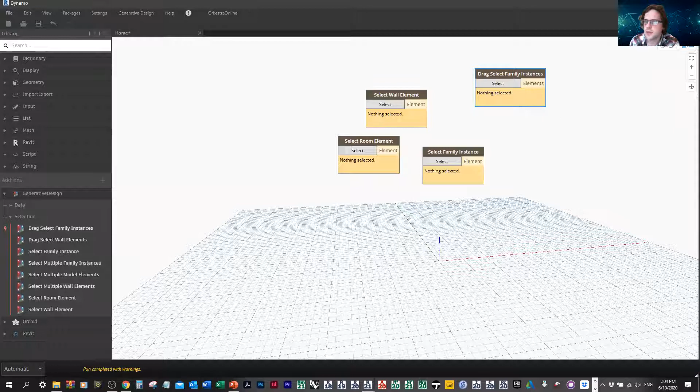There's also another question regarding architects and designers with more than 20 years of experience. If I get it right, the question is more a comment related to the process - that this is somehow helpful to understand, and it's an addition to the design process and mindset somehow.

Yeah, definitely. Generative design's been a good way to expose at a more present level in the industry how computational thinking really has to operate to support a meaningful outcome. Even this presentation I showed today wasn't as focused on Dynamo itself, but more about giving honest advice to people trying to set up generative design in their company. This is probably the next barrier most people are experiencing with the tool, not necessarily how does the tool work, but more about how can I justify return on investment to my directors, or actually generate meaningful outcomes for the clients.

So yeah, I totally agree that it's more about the way of thinking that supports rather than using Dynamo itself. Obviously Dynamo is still necessary to generate the result, but the thought process is much more intrinsic. I think it does mean that those 20-plus non-technical users still have a very relevant place in this type of design process, because they can still think about design constraints and how they might measure the success of the design. They also bring a lot of realistic construction limitation to what a building can even do - sometimes you might see an outcome and someone might say that cantilever is not possible. So you can sometimes marry those two schools of thought together in this process.

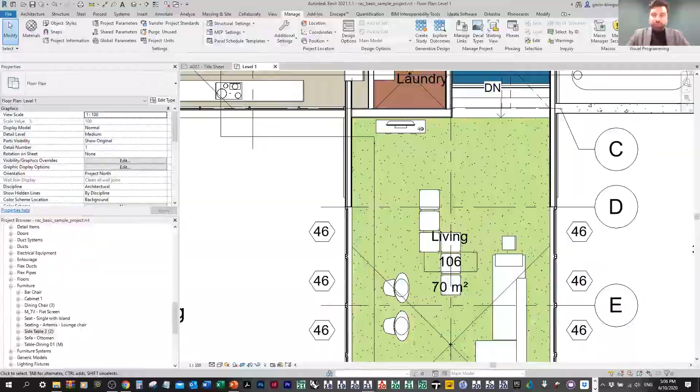I just want to highlight some points I found inspirational in your presentation and very fit for our discussion. The first one is that generative design is about the right questions - this is the first point we all need to remember when approaching generative design. The second is that generative design is a multidisciplinary effort involving design principles, math, geometry, programming. And the third is that generative design is also a creative approach to define a path, basically a strategy to go from the start - the questions we talked about - to the end, the possible solutions. So it's not just a technical effort, it's a creative effort as well.

A couple of personal points: the value of some solutions is also to break barriers, like you said, enabling users to then explore other solutions. So the value of Dynamo in this context, in my opinion, is that it's very useful to get in touch with the principles, the philosophy somehow, and then to explore more complex solutions, like Grasshopper, or based on Rhino, or even through classic programming.

Why not? And you pointed out a few times the computational limitations of Revit and Dynamo, and this is an important point - most of those are related to Revit using a single processor for most processes. So that's somehow a technological limitation that, in my opinion, limits the application of Revit and Dynamo to very complex studies. It's also just based on the Autodesk Shape Manager portion of the way it's been set up as well.